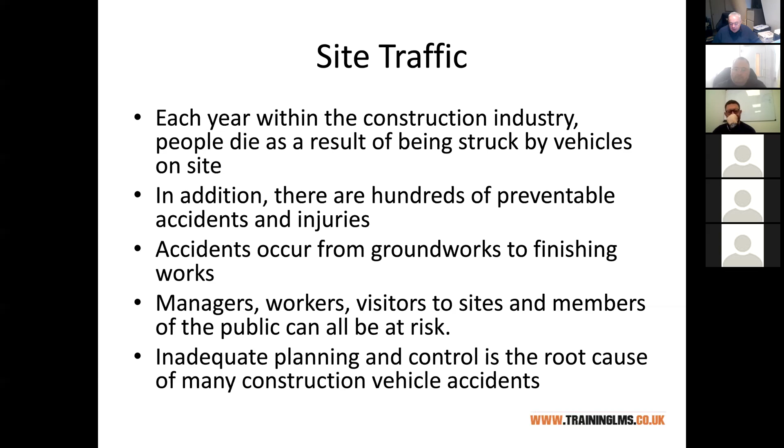So it is an activity that causes deaths. It is an activity that causes serious injuries. What can we do about it? Well, the simplest, number one, easy thing to do is try and keep pedestrians and vehicles apart from each other - segregation.

When we look into accidents and accident investigation, what we see is that a lot of it comes down to poor planning. If you recall a few sessions ago, I did a session with you on accident reporting, and I said that in accident investigation you need to get right down into the root cause - not just 'you shouldn't have been there' or 'you did something stupid.' Often as not, with accidents involving pedestrians and vehicles, the blame comes down to poor planning, poor design.

So that is a management function that all of you need to consider. And as it's a smaller group, I know most of you now, I know what your backgrounds are - for example, Mike there, who's more office-based and involved in QSing or the estimating side of things.

So in those sort of scenarios, why is this relevant? Because there's no point sticking your head in the sand about what we're going to need here in terms of cost, because a lot of the things that I'm going to show you next, they cost money.

Okay, so there's no point denying that we're going to need certain things to try and keep the site safe. I'll show you some graphics and photographs. Obviously, every site is different - circumstances, location, and the resources you have available all differ. Even those of you who travel around the country might see a difference between a high-profile city centre Dublin project, under the microscope from the HSA or the client, to a more rural location where, to put it discreetly, you might get away with a little bit more. We have to be honest and recognise that even within Ireland there are different standards - some areas where you'll get away with more than others. But you have to have some budget, some resources put into health and safety. There are particular measures we'll talk about now that, let's face it, are going to cost money.

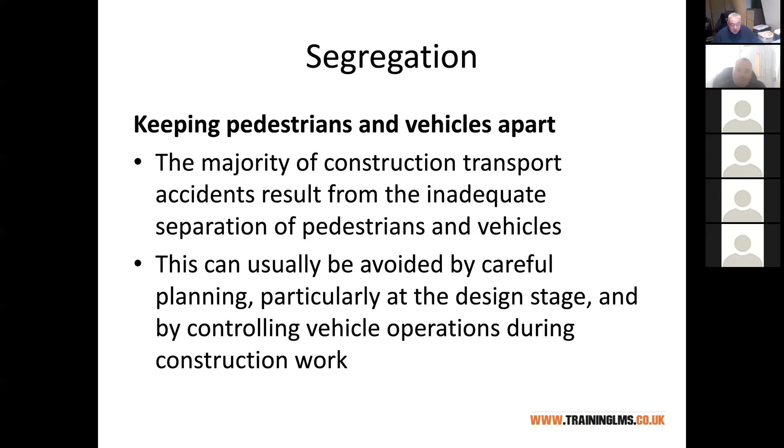So if we're trying to keep people and vehicles apart, it's not going to be enough just to tell them, 'watch out, don't run over anybody there, lads - if you see a telehandler or anyone on the site, give it a wide berth.' That is not going to be enough.

You're going to have to provide, if the site allows it, some areas of segregation. And again, a few bits of rebar and a bit of red and white tape is quite often not going to be enough to provide that segregation - there's going to have to be some sort of fencing where you can do it.

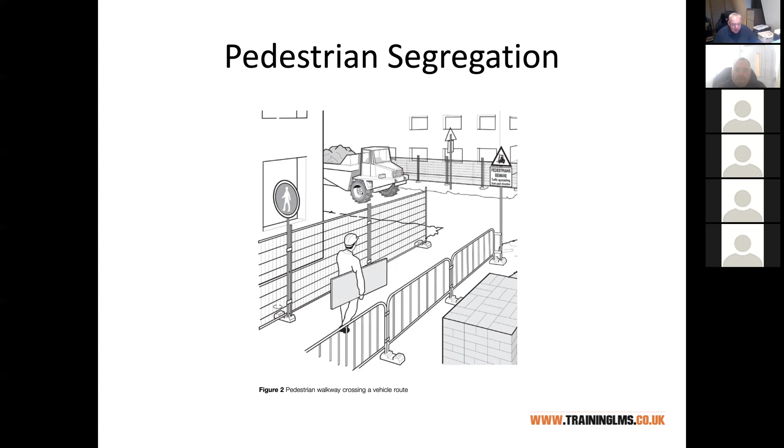But most competent larger contractors will have their own rules about what we should have, and there are a few other documents I'll link you to that have popped up on Moodle as part of the resources for this. This is one particular UK-based contractor - obviously a major project, with a lot of workers on site who have to get from different areas across it, and a lot going on in terms of site traffic and machinery.

So in this case, they've got robust materials such as timber baulks, concrete barriers, or in some cases scaffold guardrails, that provide a good solid physical barrier between where people are walking and vehicles. So even if somebody does lose control of a vehicle or reverses without seeing, there is at least some sort of protection before they come into contact.

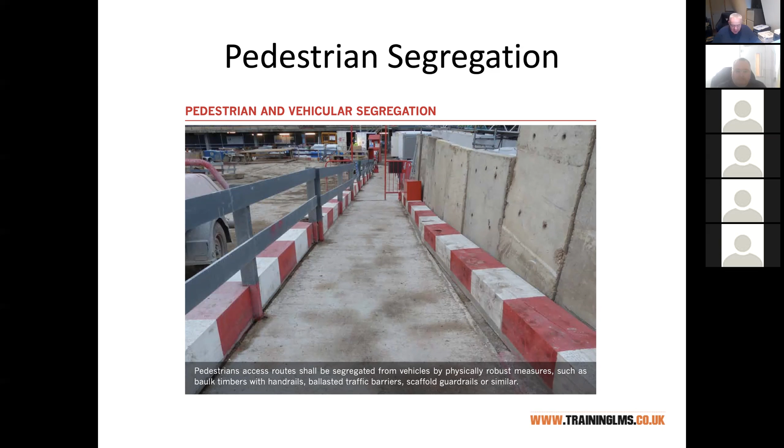Now, building sites are, by their nature, temporary - you're excavating, levelling, hardcoring, putting different finishes down.

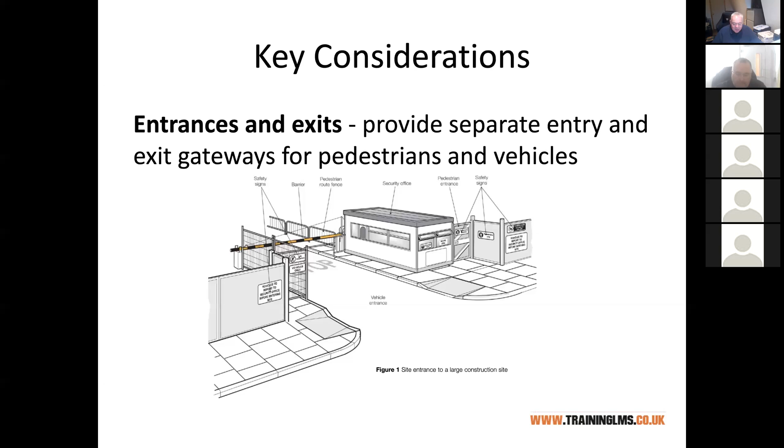Things will change. You've got to dig, not just excavations, but drainage to put in and so on. You've got to stockpile things. So you're very rarely going to have a nice level site all of the time. But you do need to give consideration to areas where there's going to be a lot of traffic and people, pedestrians walking back and forth.

It's got to be as firm as possible. We've all been on sites where you step out of the site office into the gutters, stepping through stuff, around stuff, over stuff. On a good professional site, you will have firm, level, well-drained walkways that take as direct a route as possible to where you need to go.

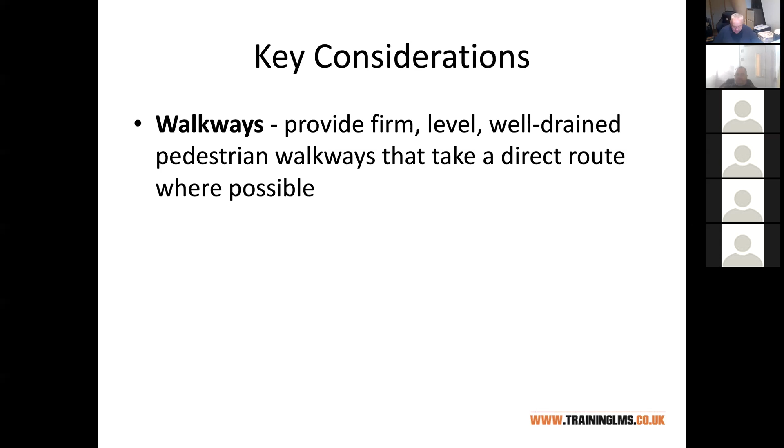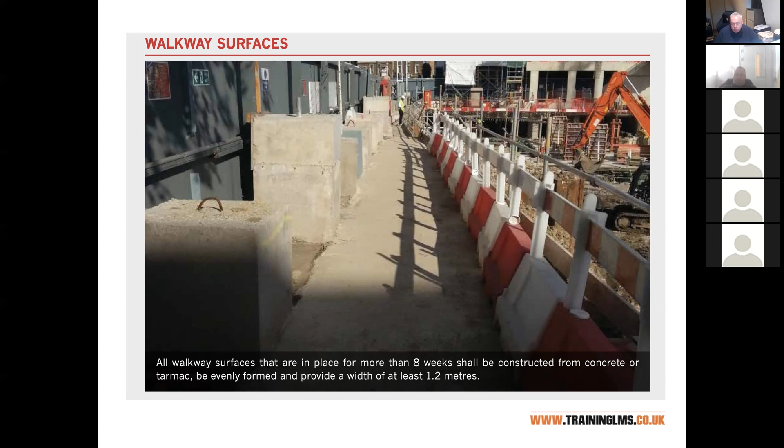Just showing you some examples here. This is a UK-based developer who have their own guidelines. If there's a walkway that's going to be in place for more than 8 weeks, they concrete it or tar it, make sure it's nice and even, with a width of at least 1.2 meters. If it's going to be there for less than 8 weeks, they don't go to the expense of concreting or tarring it, but use compact fill, still nice and even, nice and level, with that same width of 1.2 meters. Great if you have the resources and space to do that.

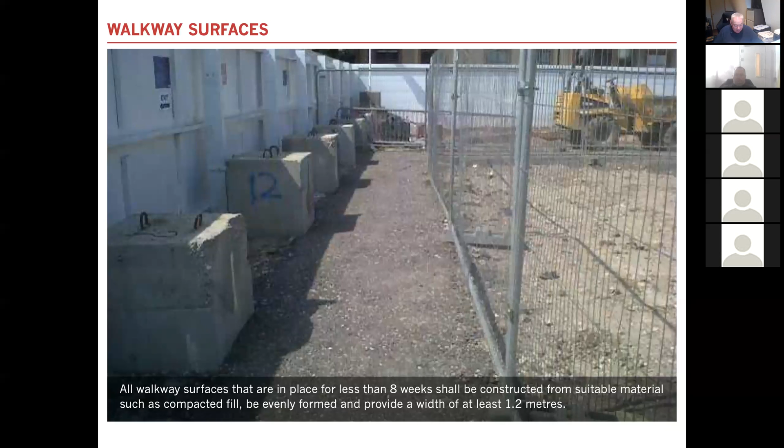But we have to recognise that on larger projects, this is the type of investment we're going to expect to see. In this one, it's not so much about segregating traffic, but you've got lots of storage areas and potential for falls from height, as you can see on the right hand side. So there's different materials being used here: proprietary barriers and scaffolding with mesh barriers as well.

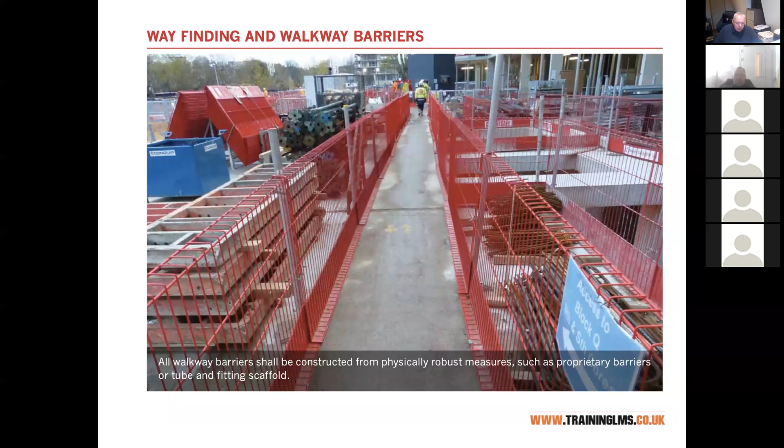Especially when doing multi-storey buildings, as the building rises, particularly with tight sites and footprints of the building maybe taking up the entire space, we need to utilize the constructed floors or basement areas for what might normally be our site compound storage areas, and even accommodation.

So sometimes, even though it's indoors, we need to recognize that we need to mark walk areas. In this case, it's got a matting system, and there's some segregation between the work areas and the material storage areas. That photograph also demonstrates very well the importance of lighting.

There was an unfortunate fatality a number of years ago in Belfast, where they were renovating the old Ormeau bakery into housing apartments, and a telehandler driver unfortunately struck somebody in the basement area while reversing. Poor lighting, poor segregation, and so on - unfortunately a lesson learned in the hardest possible way. That's why I've emphasized lighting two or three times.

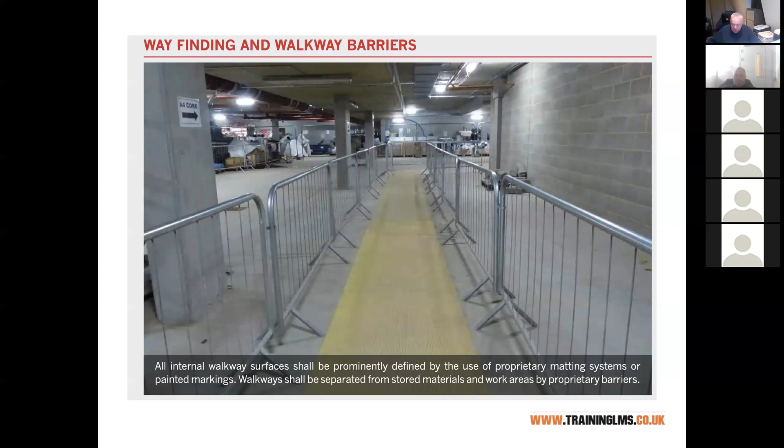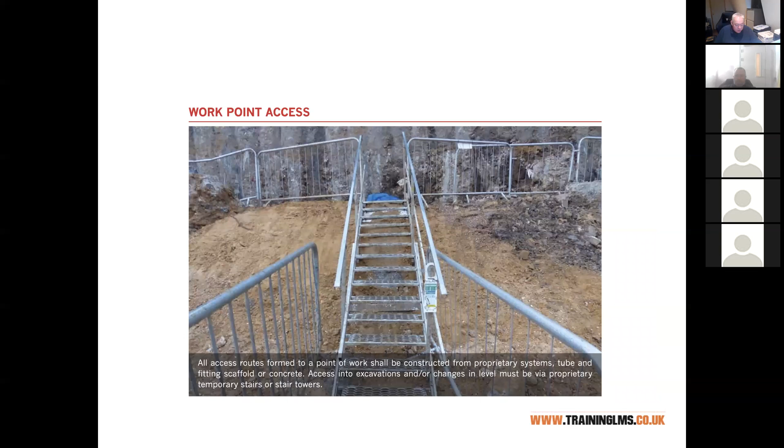Our walkways predominantly take us to and from a work area, from the site accommodation up into the building or wherever. But also remember, sometimes we need to get to a point of work - sometimes just a temporary thing, down into an excavation, maybe to do connections and fittings. So we need to consider how we safely get people to those areas, as you can see here using temporary steps and handrails to enable safe access.

From what you've seen in those first pictures, a few other things we need to take into account: we're going to have spaces where people are crossing. We need signage, lighting, enough visibility so that people can see each other - drivers can see pedestrians, and pedestrians can see vehicles.

Exactly the same when we're getting onto the public road. We all know what members of the public are like, a law unto themselves when it comes to paying attention. So with vehicles and people going out onto the public road, you've really got to treat them with kid gloves - a bit of signage is not going to be enough. If you've ever walked, cycled, or pushed a pram along a footpath, you'll know how obstructions or people parking on the footpath can be a nuisance - exactly the same applies within the confines of your sites.

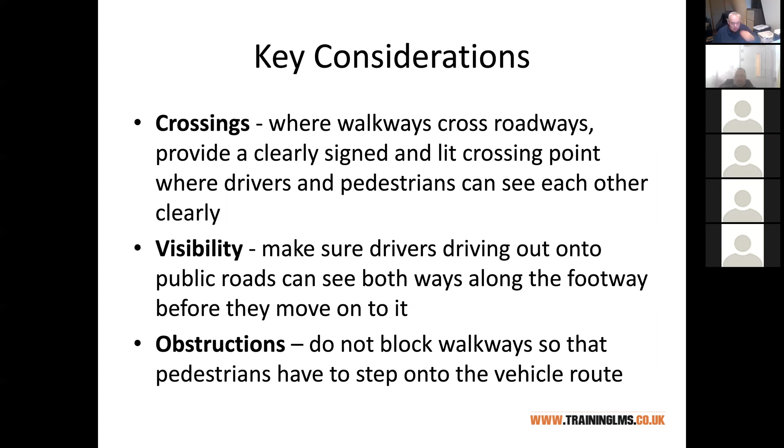If you have walkways, it's a nice clear level area that somebody might be tempted to drop a pallet of stuff down in, or temporarily store something there for a while. But walkways are there for a reason, so you want to make sure you don't allow them to become obstructed.

Another photograph here as an example. Again, a big job which has the site accommodation at the entry, but you'll see where the site door would open, they have the extra protection of a vehicle barrier that stays down to enable people to walk across the walkway in front of the gates. There's lots of signage, warning signage, speed limit signage, and little speed humps just at the area where the most traffic is going to and from the site office.

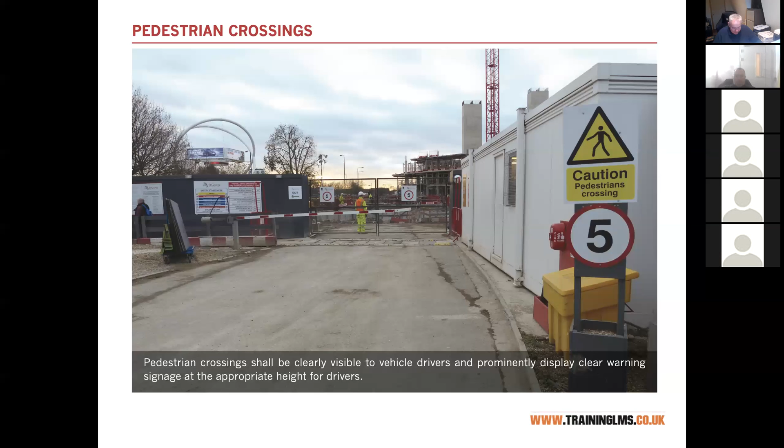Also have to recognize that sites change, sites can change on a daily basis. What was there in the morning mightn't be there in the afternoon, or vice versa. So we've got even excavations taking place in the photograph here, with a piling rig. So we have areas that maybe temporarily become a no-go area for pedestrians. We need to give people a wide berth, and we know what people are like sometimes when they have to get somewhere in a hurry, thinking of something else, walking a route they've always walked, and suddenly they find something in their way.

So sometimes we physically need to prevent people. The signage is not going to be enough, so you use your temporary barriers, such as in the picture, which are very easy to move around as the plant machinery itself moves around.

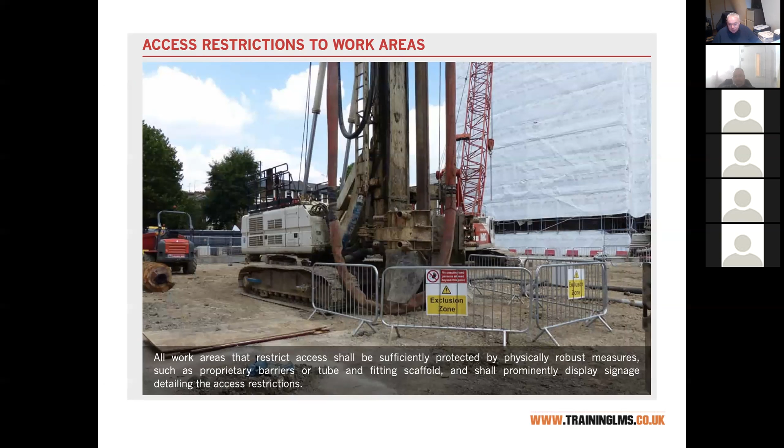Don't have to get too much into electrical safety as part of this course. A couple of years ago we had a project scenario that had high voltage cables running across the corner of the site, and we did have to incorporate that into a risk assessment and method statement. But again, there's no obvious sign of high voltage cables on our wedding venue project.

But I'm sure some of you on larger jobs have come across the concept of the goalpost before. You'll see it in road building and external works, where you place barriers, whether concrete barriers or using the excavated spoil, to physically prevent vehicles from passing underneath the cables or storing underneath the cables, except in clearly designated areas. The goalposts designate the maximum height a vehicle can be to safely pass under the high voltage cable.

Now, I have some guidance that I will put on Moodle for you, from both the HSA, particularly about construction plans, and also from HSE in Great Britain, which could be very useful if you get a question around this, or if you are planning site traffic and traffic layouts on your site.

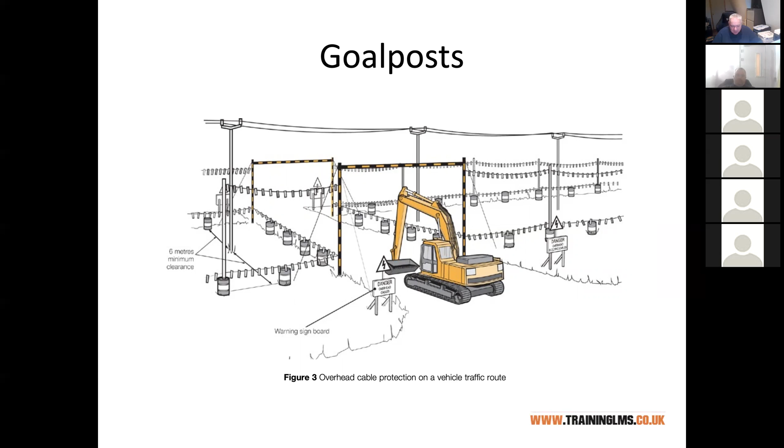I'm not going to run through all of these, as all the documentation is on Moodle for you. But to give you an example, this is a document the HSE produces in Great Britain, and it gives you examples of typical problems you might face on a new build, a greenfield, or a brownfield site. For example, what if you have contaminated land or muddy sites?

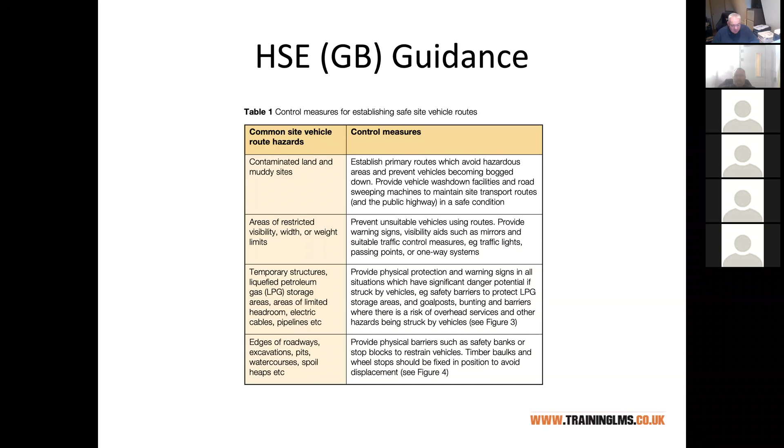What if there's restrictions on visibility or width? What if you've got temporary structures like gas storage areas or overhead power lines? What if you're having traffic near the edge of excavations or pits? It gives suggested control measures to deal with that. For example, the last one about bringing vehicles close to the edge of excavations, things like concrete wheel stops, or even using timber, which can physically prevent the vehicles - you're not leaving it entirely up to the judgment of the operator.

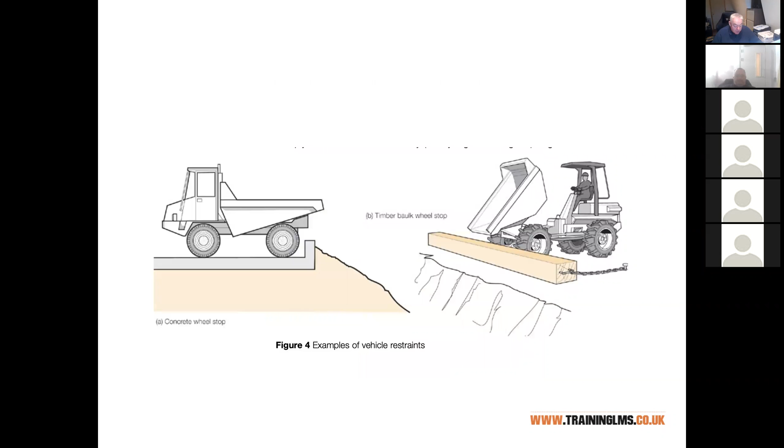There's more guidance on different areas of the site. You've got the entrance and exit, the parking areas, the offices and welfare facilities, your primary traffic routes, your secondary traffic routes, your storing areas, your loading and unloading areas, and areas you might need for some of your vehicles like wheel washes. So it splits the site down into different areas, and gives you guidance on what you should incorporate for vehicle routes and what you should incorporate for pedestrian routes. It's a useful document that could help you write a traffic management plan.

Now, one of the things that obviously comes to the fore when it comes to vehicles - I've already mentioned the unfortunate fatality in Belfast a number of years ago involving the telehandler reversing in the basement.

Reversing or any sort of turning is always going to be an area that increases the risk. So when we're thinking of our site layouts, our traffic management plans, we're always trying to avoid, or at least minimize, reversing, because it's a major cause of fatal accidents. And we can do that a number of ways, like one-way systems and so on, or turning circles.

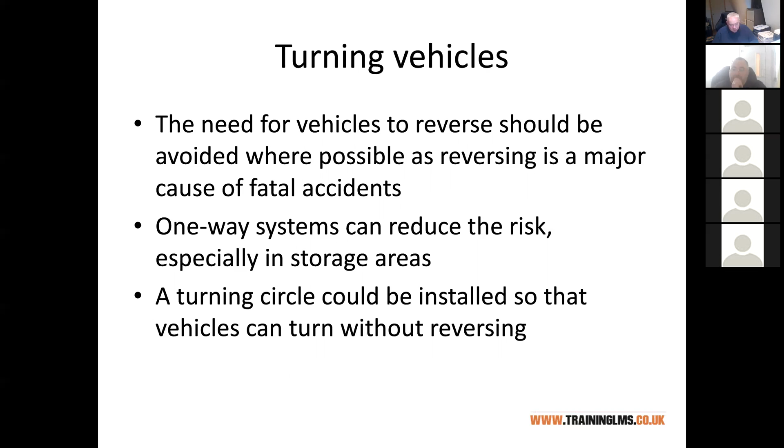Just to show you, there's a good little table that shows the hierarchy of control we talk about. In other words, what's our preference going to be to avoid reversing? Well, the preference has always been, can we not have reversing? How could we not have reversing on site?

We could have a one-way system, so the vehicle comes in, unloads, and continues in the same direction to exit the site. Or indeed maybe around a turning circle or something like that. But you're not going to have the room and space to do that in every job.

So then you go, right, what's the next best option? Can we reduce the number of vehicle movements? Not have deliveries coming in and out all the time, or schedule them at different times. Educating the drivers not to reverse unless it's absolutely necessary.

Then we get into our segregation. Then we get into our safe systems of work, things like having reversing cameras and beacons and reversing sirens, and good signage and high visibility. So that's kind of the mixture of controls you need to try and reduce the risks from reversing.

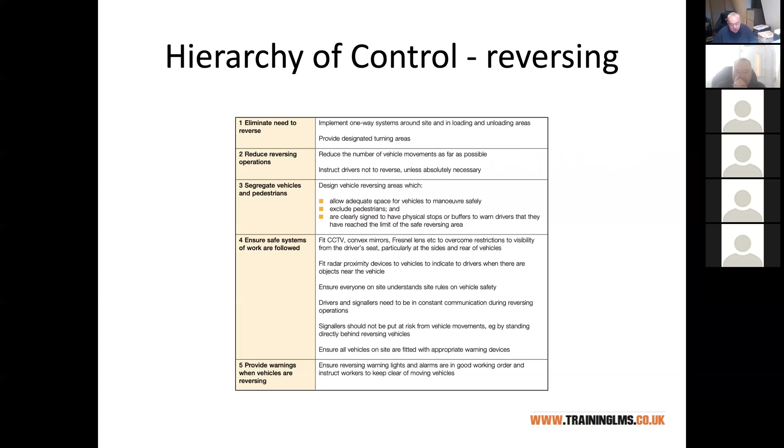Let's be honest, I'm showing you lots of pictures of big sites here and lots of resources. Plenty of times you'll be on a small site where there's only room to park the van, and that's about it. You've got deliveries coming in, people double parking, and you're double handling to get stuff off. So you're not always going to have that perfect world.

So you're all in this course because you are construction managers, and a key point of a construction manager is to be the planner, to be somebody who's planning what is happening. So good planning will look at trying to minimize vehicle movements around the site.

Got to think about things like parking. Let's be honest, our advice to people, especially in the last 9 months, has been to travel to site separately, restrict the numbers traveling together, and all of these things. They're increasing the number of vehicle movements, so we have to be realistic about that.

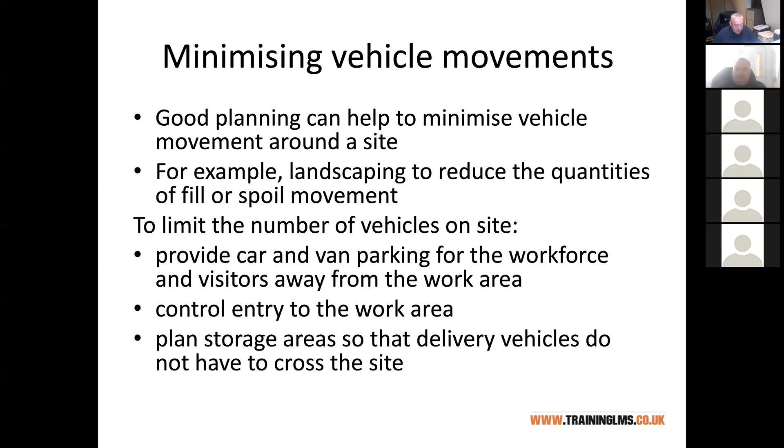We can have all the best systems in the world, signage up and paperwork completed, but there's a large element of this that is also about people. If we think of the operators, you've got the right operators - the starting point is you've got the right certification, the right ticket, the right card to operate the machine. But you'll also come across people who have the right ticket and card, and they've been absolute disasters operating the machinery.

Just because somebody - look out your window and see everybody driving past, every one of those people should have a license. It doesn't mean there's not some idiots out there. So the number one starting point is, do they have the right certification? But then keeping an eye on people, do they look like they're competent? Do they look like they're safe to operate it?

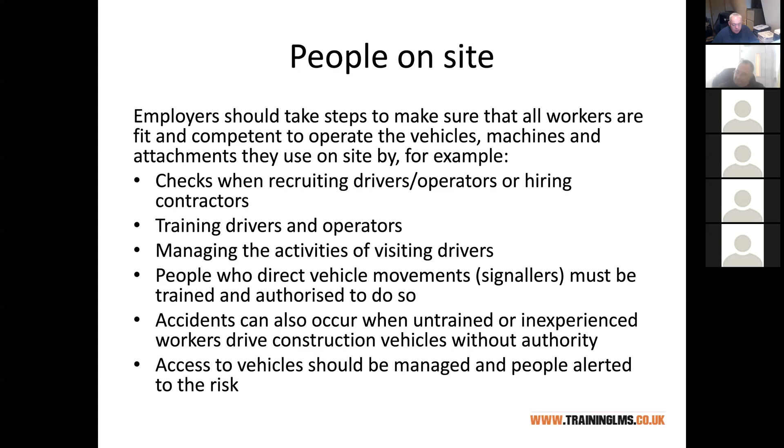So it's the right sort of training that we give to people. Also keeping an eye on people that are new to the site, or that we're not familiar with, subcontracting, hiring things in all the time - you're trying to keep an eye on that. We also know that people are giving guidance, and there's authorized signals and training that you need to understand and give those signals. It's not just thumbs up and back a bit or forward a bit - people stick to doing it the proper way. So there's an education element, and this comes back to some extent with your inductions and just how much you cover with them whenever you first get them onto the site.

Goes without saying with regards to visibility - the clue is in the name of our clothing: high visibility. It's nowhere as important that people wear the right high vis gear than when it comes to traffic. This time of year, thinking about how dark it gets and some of the murky days we have, it's just so easy - the best people in the world can be guilty of a slip for a second. Somebody takes a shortcut on a route they're not meant to take, somebody is reversing a vehicle or driving and just for a split second isn't paying attention. The more we can do to prevent that from happening, the more we can do that people would see that before it becomes an issue.

So the high-vis clothing, good lighting around your site, properly trained competent drivers and signalers and marshals, and the machinery having the latest best equipment in terms of the right mirrors for reversing, CCTV cameras, reversing alarms, and so on.

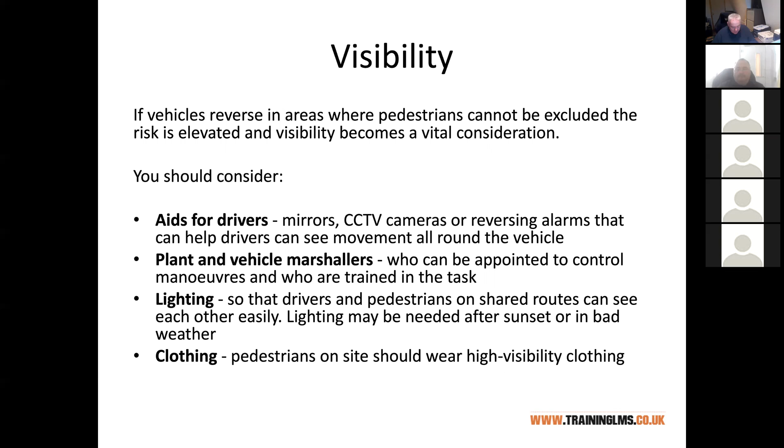And I've already touched on signs and instructions. You don't want to overload people with signs everywhere, but we all understand basic road signs, warning signs, speed limits and things like that. So you use very similar signs to the type you'd be used to seeing on the highways. You've got to get the balance right - there's some very funny photographs out there of sites with big notice boards up trying to get far too much information across. People will just not read it. There's a balance of what information that people will take in.

There's a good document - some of you never used it, but I've given you a link to it there, and I'll put a copy in Moodle. It's an HSA construction site traffic management plan guidance. If you were to get a question like we've had before, asking you to do a site traffic management plan for the wedding venue project, that is your Bible effectively for that. It will give you all the guidance you need and a template of how to do it. Some of you might have your own traffic management plan templates - that's fine to use as well if your own companies have it. But out of everything we're talking about this morning, if there was one strong possibility of a question, it would be to ask you to do a traffic management plan for the wedding venue project.

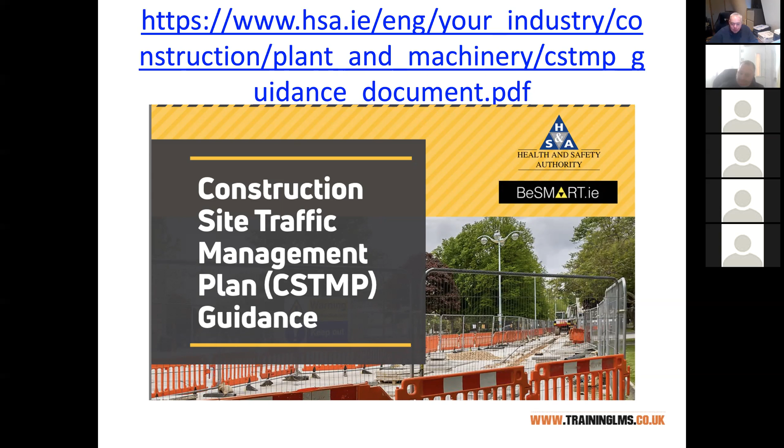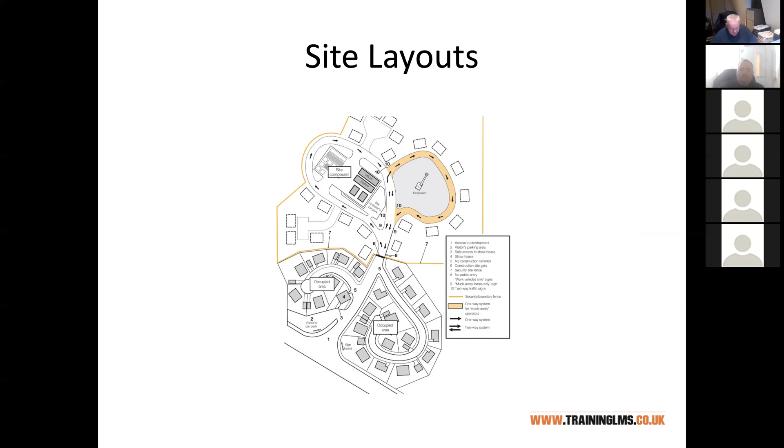A couple of years ago, we had a city centre job which created additional project problems. You have your one-way system and so on, and you're working out where all your accommodation is going to be, your short-term parking, deliveries, and wheel wash. If we'd had a city centre job this time, I'd have flagged this up as a much more probable question, but it's a reasonable one if you get it, because it's not 2,000 words of text. It's a drawing plus a bit of text to explain how you put the drawing together. Okay, so that's site layouts.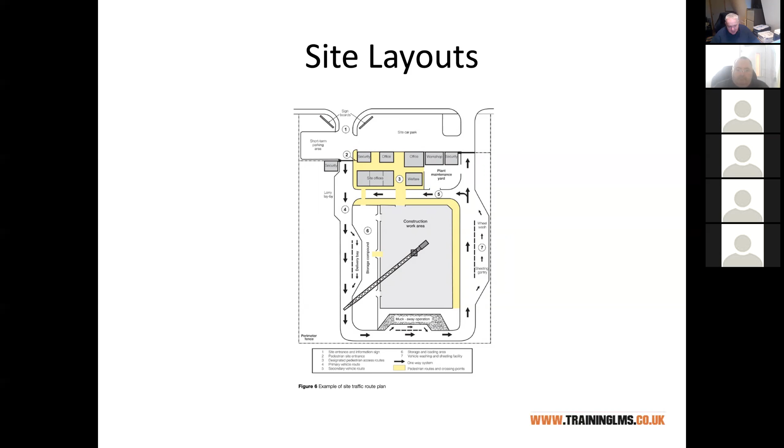Talk for a minute about health and safety management systems. You already know from the course and your previous health and safety knowledge, there's lots of legislation and guidance we're meant to adhere to in managing a construction project. Sometimes you sit and think, well, how do I know if I'm doing everything I'm supposed to be doing? Or clients will sit there and go, how do we know that this company's as good as they should be and that they're doing everything they're supposed to be?

So something that has been around for a number of years are health and safety management systems. Now, management systems themselves exist for lots of things. There's quality management systems, environmental management systems, and of course health and safety management systems. The main one, we used to call it OHSAS 18001. It's now called ISO 45001. Some of you are probably familiar with Safe-T-Cert, another one we have, particularly in Ireland. In the UK, they have CHAS, another one. They're all just different types of health and safety management systems.

What basically health and safety management systems are, somebody comes in and looks at your company and carries out an audit, usually an external person, and effectively what they're saying is they're giving you, hopefully, a clean bill of health to say that the system your company has in place is robust enough to meet all the required standards for health and safety legislation. You're doing things in the right way. Now, it's only a snapshot, because we all know when auditors come in, you get everything lined up and looking good for the day because the auditor's there. But it provides a degree of comfort that somebody independent has come and taken a look at how you do things, and effectively says you're doing it in the right way.

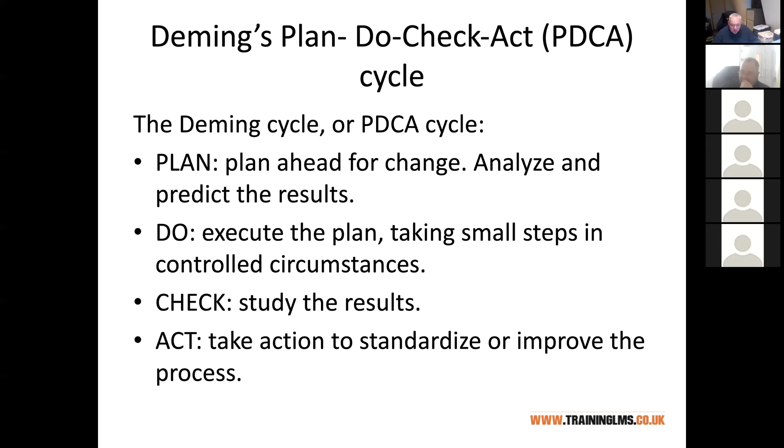And very quickly after you've started the job, you do checks. Whether they're site inspections or audits or whatever, you've got to find out, is your plan working? And let's be honest, rarely does a plan work 100%. So you check to see what parts of my plan are working and what aren't. And the important thing is that the bits that aren't working, you take action to improve it. And then that cycle constantly repeats. So that's where we get this plan, do, check, act.

Again, if you're talking about management systems or quality systems or anything, those are the sorts of little diagrams that are very useful to throw into the coursework to actually explain what you're talking about. Now, health and safety management systems have a lot better reputation now than a number of years ago. People still can come in, and it's possible, I've seen some pretty horrific examples of this over the years, where people basically cheat the system.

They get everything lined up for one day and one day only, and as soon as the auditor's gone, they just revert back to the way they used to do things. People do things a lot better now.

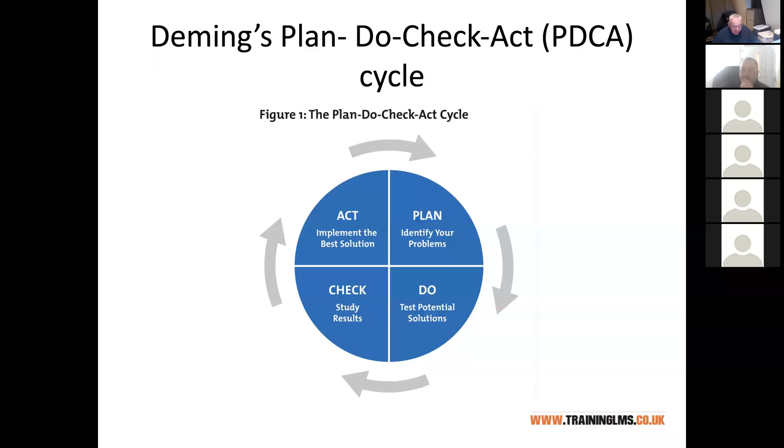But there is no doubt that a part of meeting the requirements of a management system is proving that you're doing all those things, and that means paperwork, that means documentation. So all I'll say to you, this is a bit of a health check for your own organizations.

I don't want to turn you all, I don't want you to go off annoying your health and safety managers and so on, but always ask the question, why are we doing this? Do we need to be doing this? A lot of the time, yes, you do, and there's a reason for it. But we keep health and safety documentation as simple as possible, because the simpler it is, the more people are likely to do it and follow it.

So don't just fill in forms for the sake of filling in forms. Don't rely on the fact of, is that job safe? Well, yeah, we filled in all the forms before we started it. Filling in all the forms before you started doesn't make it safe. Doing the job safely makes it safe. The paperwork is to prompt you to ask all of the right questions. Sometimes people get a little bit too caught up on the fact that we filled in the form for that, so we can go ahead and do that. The form is only part of it.

Also, there has to be good buy-in to health and safety management systems. People have to all buy into it from the top to the bottom. Again, in your roles, folks, as construction managers, you're a big part in that. You might have health and safety advisors or officers that help with parts of this, but it needs your buy-in too, and you need to practice what you preach. You'll hear people talk about the safety culture in an organization, and that only comes whenever people buy in from top to bottom.

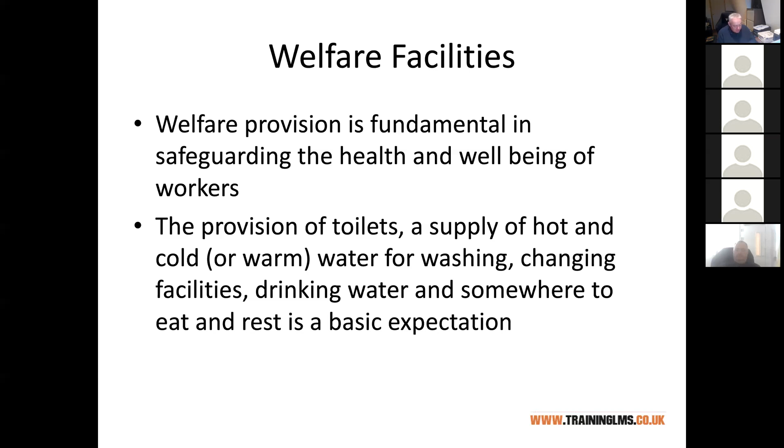You've got to start at the beginning. You're starting a job, thinking about things like your site layouts and your traffic management plans, and also thinking what welfare facilities will I need for a particular project. That depends on the size of the project, but also other things like what type of work am I going to be doing. Is there going to be a lot of work with sewers that are very dirty, or demolition work producing a lot of dust? I might need additional facilities then, like shower units and things like that.

I need to look at the size of the project. I visited a job in Scotland last year from an old candidate of mine who was the project manager on it - a big waste-to-energy plant, a huge site. They had welfare facilities dotted all over the project, just to minimise the distance people had to go to use the loo, get a drink of water, get a cup of tea, or whatever. So you've got to weigh all of these things up.

How many people will be using it? And remember, jobs fluctuate - there'll be times when there's more people working on the jobs than others. Once you provide the facilities, they have to be kept clean and tidy and properly maintained. And sometimes in jobs you have to move them around - you might have different phases, which will mean you'll have to uplift them and move them to a different part of the project. So these are all things you need to think about at the planning phase.

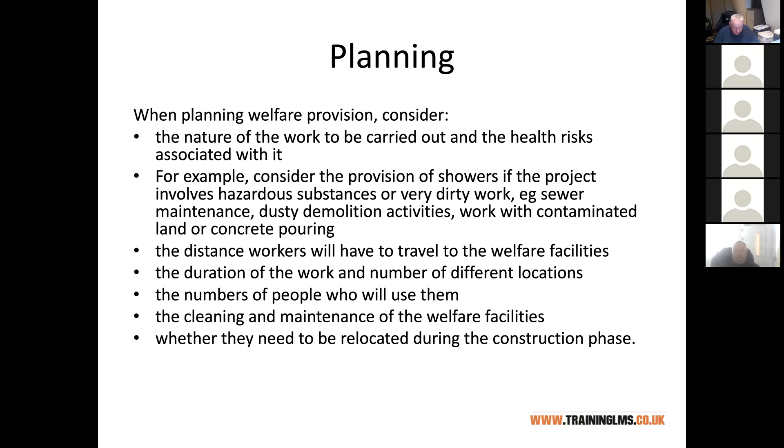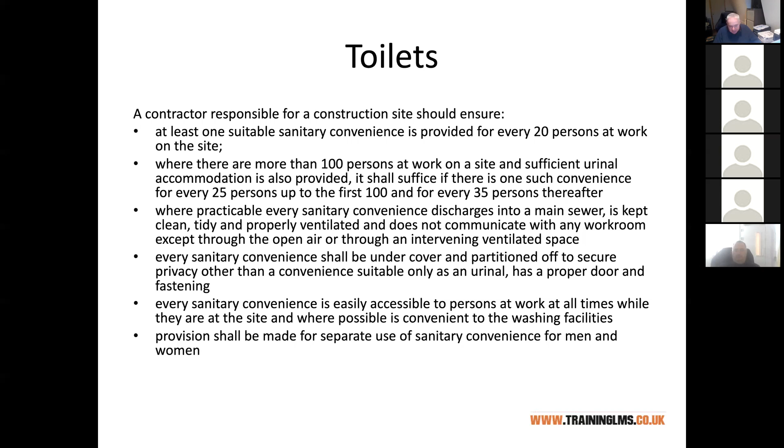I'm not going to go through the individual bullet points for each of these slides, but if you don't know these, at least you'll know where to go and find them. There are rules and guidelines about how many toilets you should have for every person at work, and the bigger the site gets, the ratio has to change, plus rules about keeping them clean and tidy, and rules about male and female facilities as well.

That leads us on to the washing facilities, and again there's guidelines about that and what you have to provide - obviously not just cold water, but warm and hot water to enable people, especially in the last 9 months when everybody's been asked to wash their hands thoroughly. We have to provide the facilities to allow people to be able to do that.

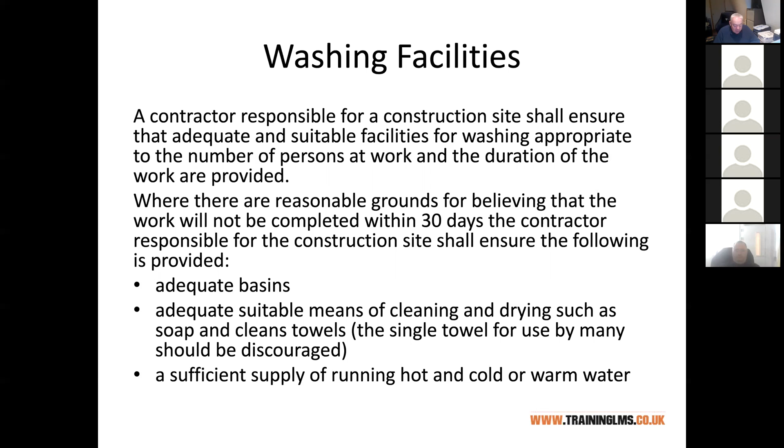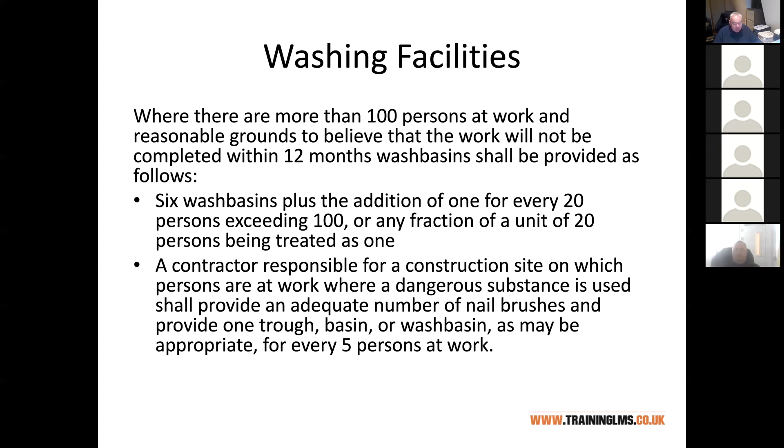And again, there's the numbers there. These are not the sort of things we need to labour, and you don't really need to get into this as part of any assignment answer, but it is important as the person in charge of a project that you know exactly what should be provided. The washing facilities - a little bit of detail on that, the difference between male and female, shower rooms if you have them, how they should be sited, and the wash basins and so on.

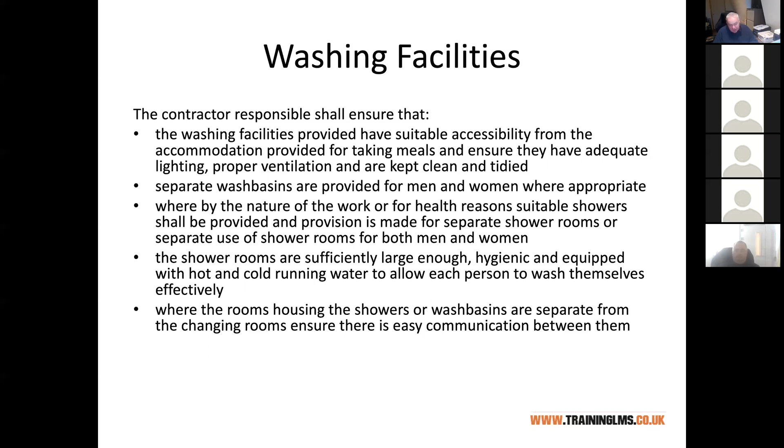And then we have our drinking water as well, which ideally should be from the mains, but if not, you can use potable water - but you have to make sure that stays fresh, and so on as well.

You have to provide changing areas and lockers, which will include somewhere - particularly in bad weather conditions - for people who may need a change of clothes, to have PPE and so on. They need somewhere to store that. They need somewhere to take shelter if the weather conditions don't allow them to carry on with their work. And that leads us into things like drying facilities and so on as well.

They need to have somewhere - I know a lot of lads like to sit in the van, but we still have to provide space for them to be able to take their breaks, heat up food, and make cups of tea and coffee and so on. And canteens should not double as storerooms - it's either a canteen or a store, and it shouldn't be a little bit of both. I know it's easy for me to sit here and say that.

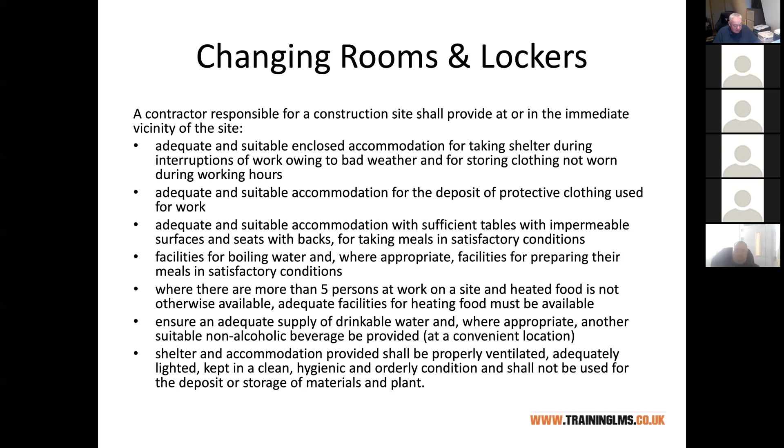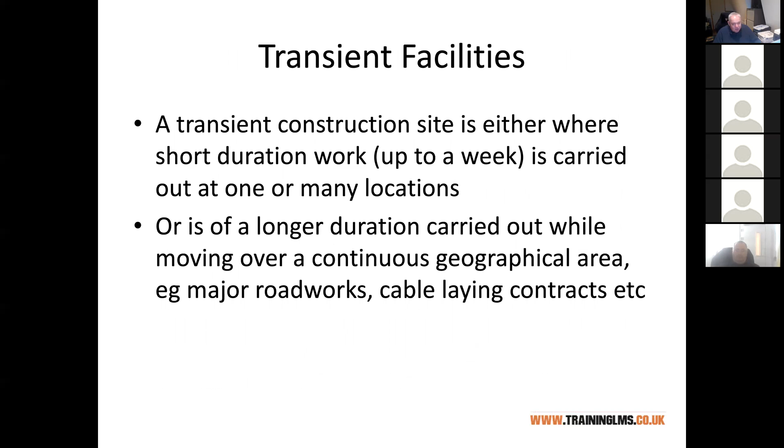And of course, we can't ignore the fact that some people are working in different locations, maybe putting in cabling, utilities, road laying contracts. So just be aware that we don't necessarily have to provide fixed facilities for them, but we need to make arrangements. Whether that's somebody doing maintenance in people's houses, working in a shopping centre, or in a hospital, making arrangements to use existing facilities is fine. But we need to make those arrangements and make everybody aware of that.

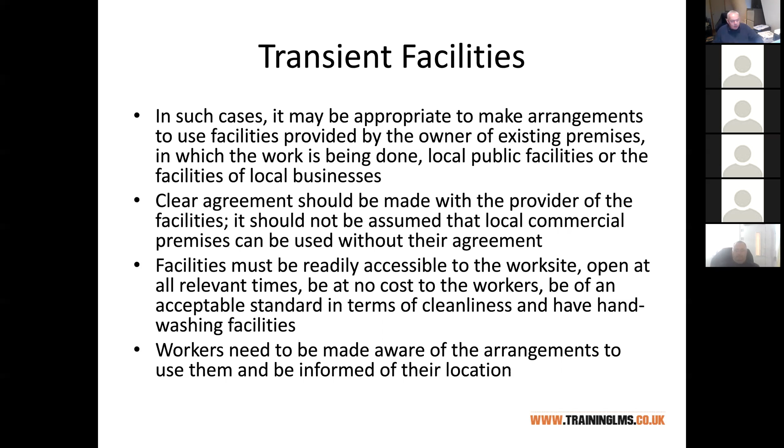So, folks, that is today's health and safety, the penultimate one. Just one more to go in the new year. I'll just take the slides down for a moment.